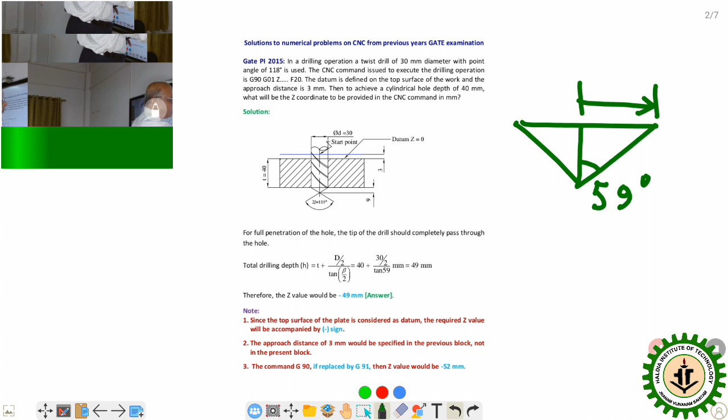So if you focus your attention on this tool geometry, it is something like that. This total included angle is 118 degree, so on one side this will be 59 degree. Now this is the diameter, so half of this will be d by 2. So we are supposed to calculate this much, right? From the geometry of this drill tip, it can be calculated very easily.

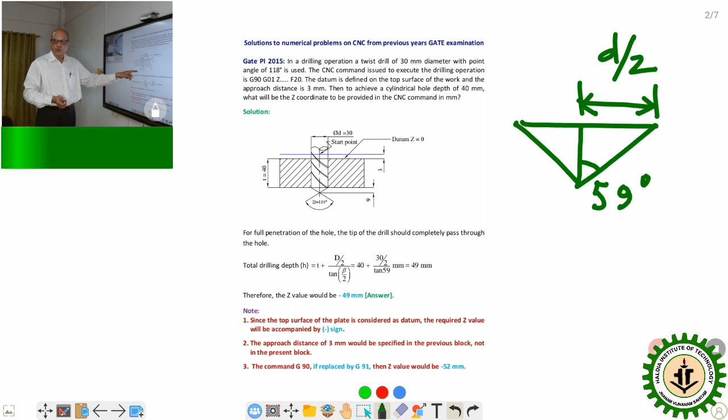This portion is equal to d by 2, that is half of the diameter, divided by tan beta by 2, where beta is half of the point angle. The total point angle is represented by 2 beta, which is given as 118 degree, so half of this will be 59 degree. So this will be equal to d by 2 divided by tan beta by 2. So the entire tool movement will be 40 millimeter plus this much.

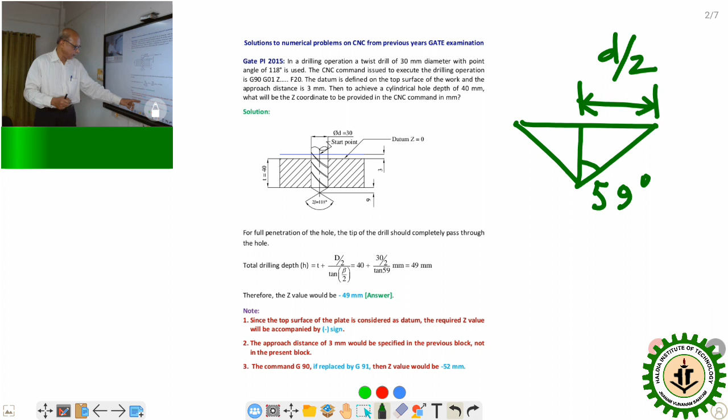If you calculate this part, 30 by 2 divided by tan 59, this will come as 9. So the total movement will be 40 plus 9, that is 49 millimeter. It would be minus 49 millimeter. So that is the answer.

Now, regarding this particular problem, as a matter of caution, I have incorporated 3 different points which you should remember. Since the top surface of the plate is considered as datum, the required Z value will be accompanied by a minus sign. Since the top surface is considered as Z0 and the tool is moving down, that is, penetrating the job, in the absolute mode we will have Z minus 49.

Now you may consider that the tool is also moving in space by an additional 3 millimeter, but since Z is 0 at the top face and we are in G90 mode, our answer will be minus 49 millimeter. Okay.

Second thing, the approach distance of 3 millimeter would be specified in the previous block, not in the present block, either by linear interpolation or point to point interpolation. The tool will come and occupy the starting point, shown here as the start point. That will be taken care of in the previous block. But the drill movement is taken care of by this particular syntax G90 G01. So your answer will be Z minus 49, feed value of 20.

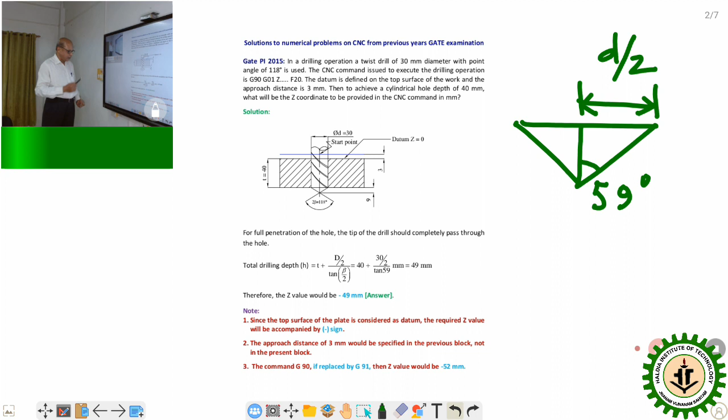Second problem, it is not a very difficult one. Still, I have considered that this sort of problem may be encountered in the ensuing GATE examination. A single axis CNC table is driven by a DC servo motor that is directly coupled to a lead screw of 5 mm pitch. The circular encoder attached to the lead screw generates 1000 voltage pulses per revolution of the lead screw. If the table moves at a constant speed of 6 meter per minute, what would be the corresponding frequency in kilohertz of the voltage pulses generated by the circular encoder?

For this sort of problem, once again I would like to suggest that you must remember or try to visualize the schematic diagram of the open loop system and the closed loop control system. If you can visualize how the power flow takes place and what the arrangement is, then you will be in a comfortable position to solve this sort of problem. Now, what is the basic theme?

The table speed is given as 6 meter per minute, which will be equal to 100 millimeter per second. So just convert 6 into 1000 by 60, that will yield 100 millimeter per second. Be careful, particularly in the GATE examination, in which unit you have to express your answer; that is usually given within the bracket. So it has to be expressed in kilohertz. Hertz means number of pulses per second. That is why I have converted it to per second according to the table speed.

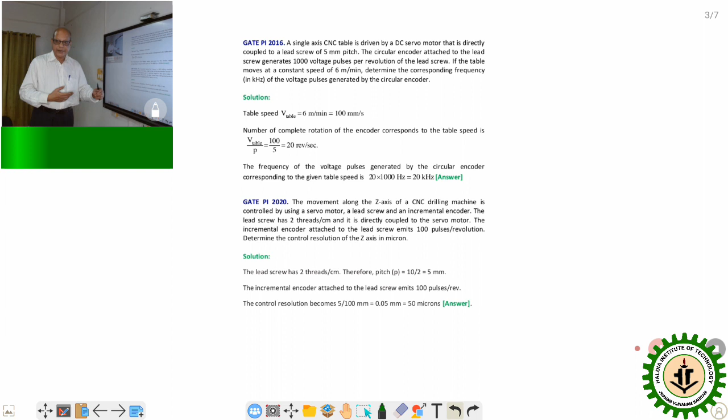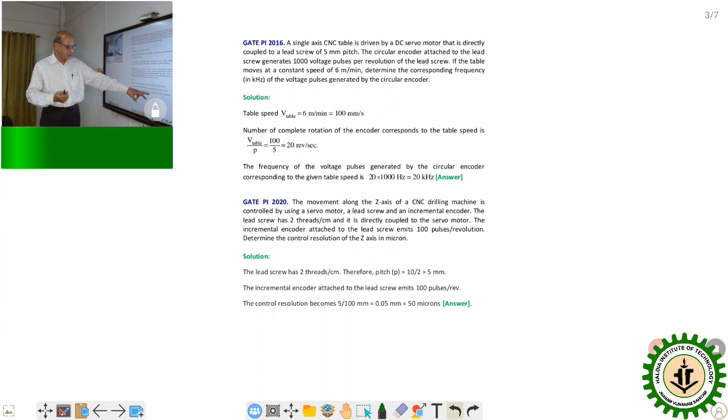2 threads per centimeter means in 1 centimeter there are 2 threads. So the distance between 2 consecutive threads, which is the pitch, will become 10 by 2, that is 5 mm. The incremental encoder attached to the lead screw emits 100 pulses per revolution. That means for 5 mm displacement, the number of pulses emitted by the encoder is 100. So what will be the displacement for 1 pulse? That is 5 by 100, which is nothing but the resolution, the basic length unit. That is exactly what is supposed to be calculated. Now what is the control resolution? That becomes 5 by 100, that is 0.05 millimeter, that is 50 microns. Very simple problem.

Another problem, GATE PI 2018. The work table in a CNC machine is driven by a lead screw with a pitch of 2 mm. The lead screw is directly coupled to a stepper motor of step angle 1.8 degree. What is the total pulse required to move the table by 50 mm?

In our earlier discussions, I believe it was lecture number 5 or 6, we had calculated the total pulse count. So if you can correlate, you will find the step angle alpha is given as 1.8 degree. So the total number of steps will be 360 degree by 1.8 degree, which yields 200.

It is told that the work table is driven by a lead screw with this pitch, and this screw is directly coupled to the stepper motor. So there is no gear in between, so gear ratio will be 1. That is, RG is 1, and pitch is given as 2 mm. So for 1 complete revolution of the motor, similar will be the rotation of the lead screw, because there is no gear.

So that implies 200 pulses will cause 1 complete revolution of the stepper motor, and hence the lead screw, and 1 complete revolution of the lead screw corresponds to p millimeter movement. So 2 millimeter linear displacement of the table is caused by 200 pulses. Therefore, the total number of pulses required to displace the table by 50 millimeters, simply through linear interpolation, is 200 into 50 by 2, that is 5000. That is the answer.

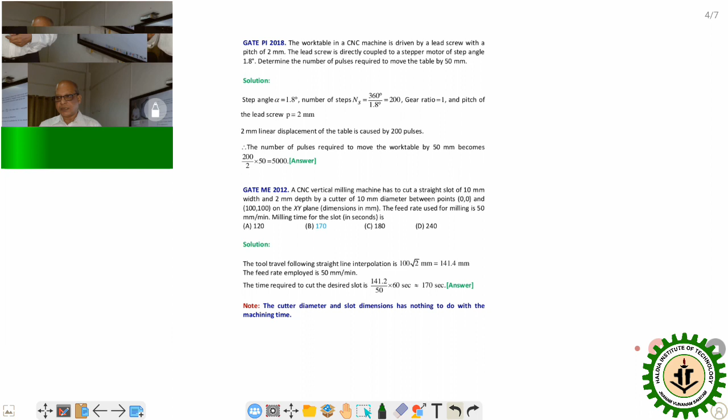While solving this sort of problem, initially you may have some confusion about the straight slot of 10 millimeter width and 2 millimeter depth of cut. What is the utility of these data? These are extraneous data which are not required to calculate the machining time or tool travel time. It is implied that the width of the slot is similar to the diameter of the cutter, and in one cut the entire 2 millimeter depth of cut can be covered. So these two dimensions have no relevance to the machining time calculations.

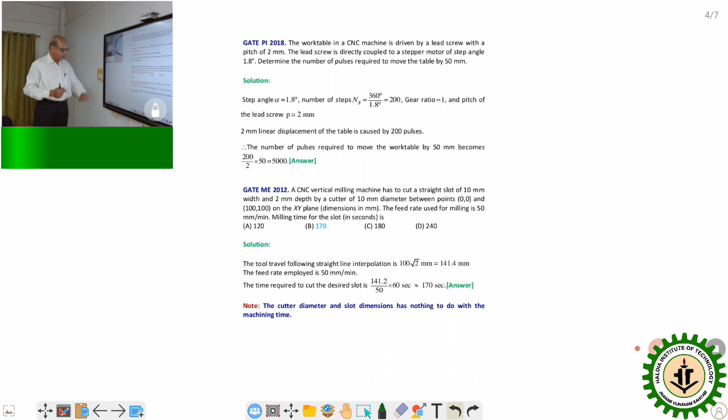This is one of the very interesting problems that I had seen in several years' questions. GATE PI 2013. A circular hollow disc of 200 millimeter outer diameter and 80 millimeter inner diameter is faced at a feed of 0.1 millimeter per revolution with a depth of cut of 1 millimeter. So consider a hollow thick cylinder having OD 200 millimeter and ID 80 millimeter, and 1 millimeter facing depth of cut is applied. The facing operation is undertaken at a constant cutting speed of 90 meter per minute in a CNC lathe.

The second part of the problem I will be discussing a little afterwards. Now, assuming approach and overtravel of the cutting tool to be 0, what will be the machining time? This is also a very unique type of problem. Although it is related to CNC, it is essentially a metal cutting problem. But this constant surface speed machining is a very attractive, distinguishing feature of CNC machining, which is otherwise not possible in a conventional centre lathe.

There is a feature which can be invoked by incorporating suitable G code. Traditionally, G96 is a command by which it is possible to implement and maintain a constant surface speed during the cutting, which is as such desirable for considering different tool-job combinations.

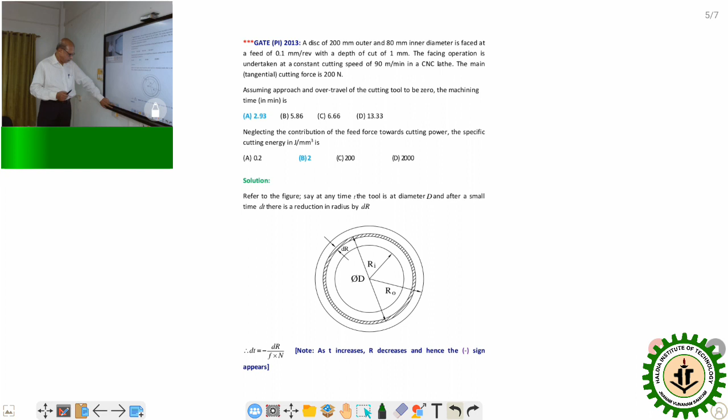So the total energy required is force into the velocity. Cutting force is given 200 Newton and Vc is also given, 90 meter per minute. So 200 into 90 into 1 by 60, because 90 is expressed in meter per minute. So eventually we have converted it to joule per second, which yields 300 joule per second.

But what is the specific cutting energy? That means the energy or power required to eliminate 1 unit volume of material. So if you divide the total energy by the MRR, you will get the specific cutting energy. Total energy is 300, and MRR we have just calculated as 150 millimeter cube per second. So dividing, you get specific cutting energy of 2 joule per millimeter cube. So the correct option will be 2, that is B.

This problem is a little bit unconventional. If you recall the sources of inaccuracies from our discussion earlier, play between nut and bolt due to wear and tear from prolonged use, backlash in the gears, misalignment, all these contribute to the inaccuracy, for which the system fails to achieve the final desired position. That means between what is supposed to be its destination and what the tool or table actually achieves, there will be some error or difference.

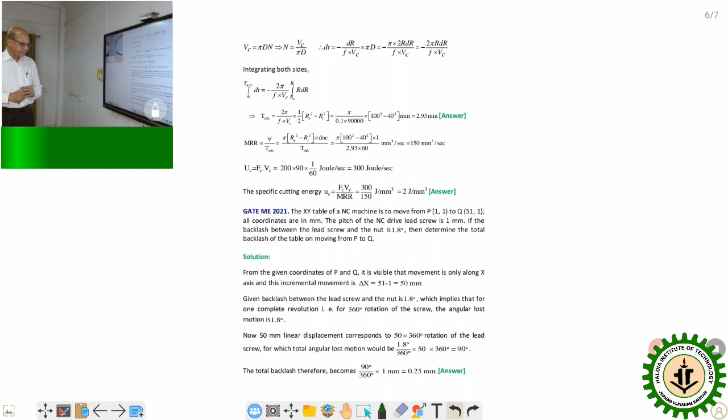So the total angular lost motion will be 1.8 by 360 into 50 into 360. For simplification, 360 cancels out, and multiplying 1.8 by 50 gives 90 degree. So for one complete revolution, that is 360 degree rotation, the lost motion is 1.8 degree. When the total lost motion is 90 degree due to linear movement of 50 millimeter, the total backlash is 90 divided by 360 into 1 millimeter, that is 0.25 millimeter.

So this is one of its rare kind. For this, you ought to remember the sources of lost motion, what the wind up error is, and the total lost motion.

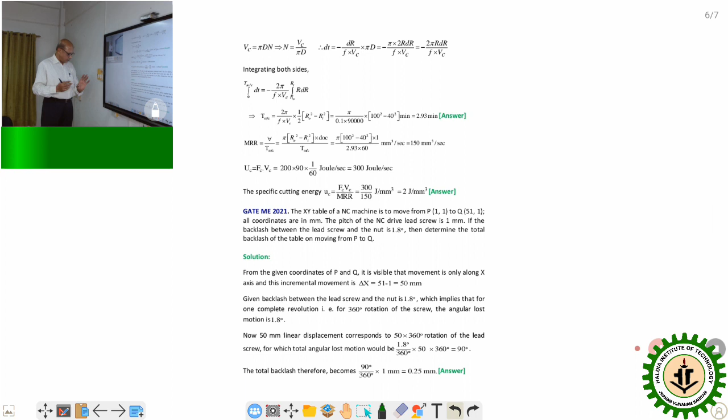This is the last problem. This problem, although it is related to the CNC, can be considered under the purview of basic metal cutting. There is a chapter called Economics of Machining. There, from the optimization point of view, this sort of discussion takes place.

Or, in case of CNC, there is an advanced module which I had not considered, that is called adaptive control. So adaptive control with optimization, that is how the operating variables, that is speed, feed, and depth of cut, can be regulated or optimized so that any objective function, that may be maximizing MRR or reducing cost, or improving the productivity, can be maximized or minimized according to our requirement.

So in this particular problem, it is told that there are two components of the cost. One is cost of metal cutting. It is a simplified version, 18 into some constant C by V, and the cost of tooling is 270 into C divided by T into V, where T is the tool life and V is the cutting speed. So the total cost will be metal cutting cost plus the tooling cost. So the two different components, that is the cost of machining and the tool cost itself, are added together to get the total cost.